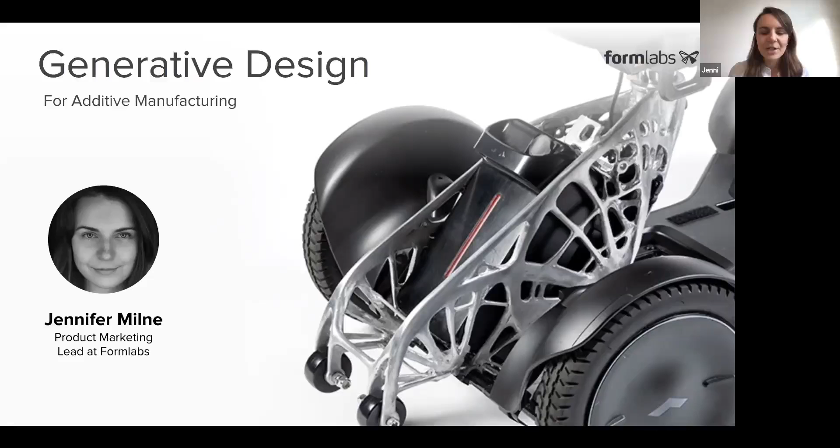Originally got started in the CAD/CAM industry back in 2004, working in steel fabrication. My background is mechanical engineering, but with a focus on product development and the product design process. And then at Formlabs, I've done various things, but mostly my team works on bringing new materials to market, as well as understanding different applications and workflows.

So a little bit about Formlabs, I'll get into generative design shortly. So we are primarily a hardware manufacturer, best known for desktop resin-based systems. We started with Form 1 and all the way to today in 2020, but we kind of have these three flagship 3D printers, the Form 3, our large format Form 3L, and the Form 3B, which is dedicated specifically to biocompatible material.

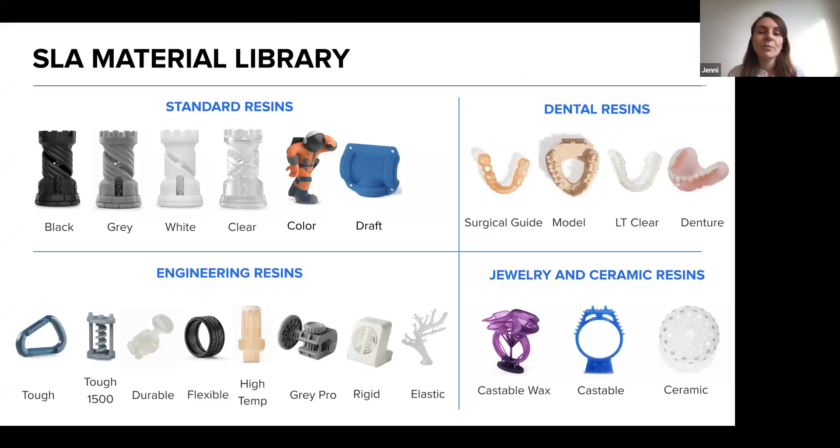While we're focused on hardware, we also make all our own materials, and we have an expansive resin library. We have standard resins for general prototyping, as well as specialty resins, so a lot of engineering resins for more challenging applications, as well as our dental materials or biocompatible materials, and some castable resins for the jewelry industry.

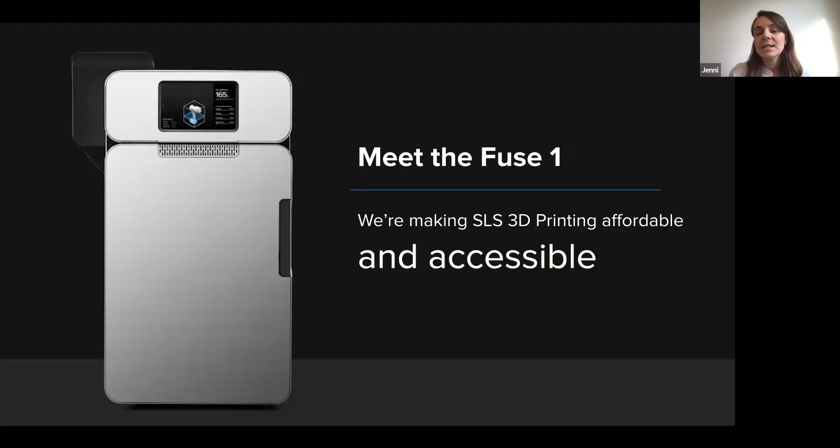And our whole ethos is about making technology accessible. We were one of the first companies to take SLA 3D printing or stereolithography and create a more affordable, easy to use desktop solution. And we're excited that we've announced that we're also doing that for SLS. So SLS is a nylon powder-based system. And with the Fuse 1, we're making SLS 3D printing more affordable and accessible.

So our mission is to expand access to digital fabrication and help anyone make anything. So while we're normally in the hardware world, we're also wanting to bring new content and help you with the design of products. And that's why we're going to be talking about generative design today. It's a really interesting sort of new field, and you may have sort of heard about it, be wondering how it relates to the work you're doing, and how you can take advantage of it. And certainly, as Formlabs, we have lots of customers who are pushing the boundaries of 3D printing and also pushing the boundaries of their design process.

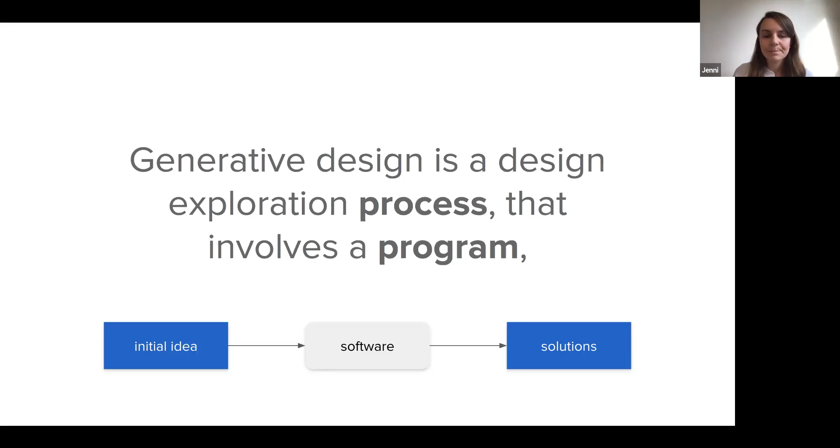You start with an initial idea. There's a program, so you have an understanding that there's some software in the middle, and out come a bunch of solutions. Now, if we take that one step further, this program is going to generate a number of outputs that meet certain constraints.

So we expand this model to say there's not just a bunch of solutions, there's an infinite solution space.

That software we can think of as rule algorithms and the underlying source code. It's still software, but it's important to acknowledge that there are rules about how you reach the solutions, and the source code can provide the different input variables.

So where does the designer fit into this? The designer is really there to fine tune the solution space by modifying parameters, rules, or underlying code. This is as complex as this definition is going to get.

When we put that all together, normally the designer is responsible for a linear design process, or a double diamond design process, where you're exploring ideas and pulling back toward a solution. Whereas here, the designer is responsible for this whole process and this feedback loop.

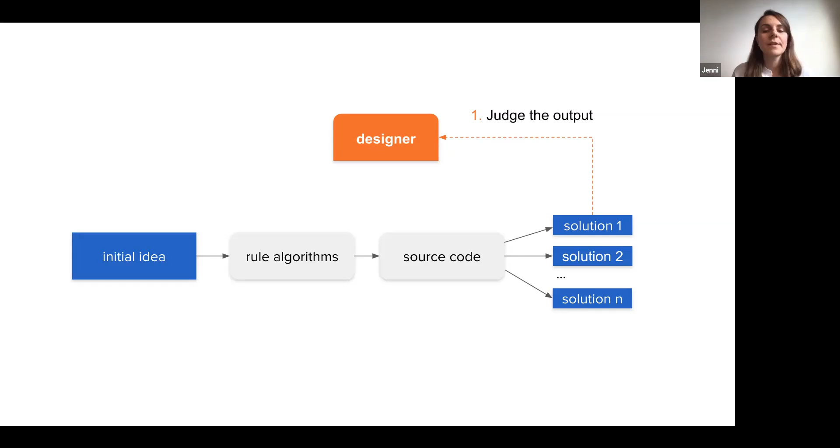So the designer's role is to look at all the solutions, judge the output, and then go back in and fine tune by either changing the rule algorithms or making adjustments to the input problem and the input variables.

Then you can reiterate and get a bunch of different solutions coming out. So it's not wildly different from how you may design products today, but it is much more focused on this iterative feedback loop.

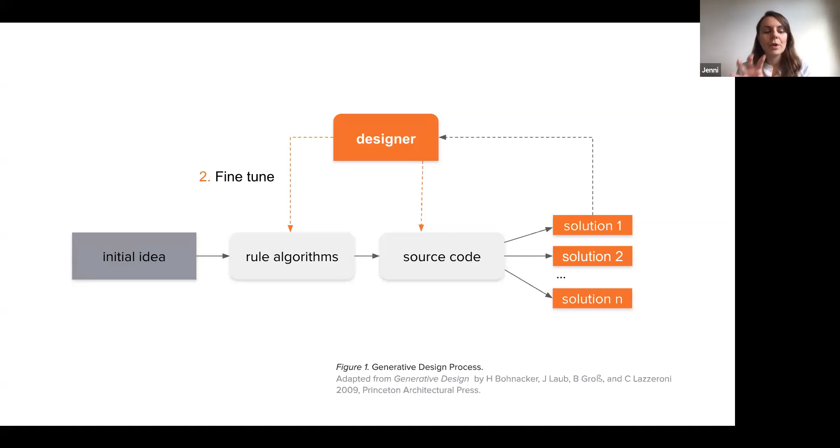And the designer's role is more about the logic and the definition of how you're going to reach those solutions.

One thing which maybe holds back the adoption of this technology is, if you start researching generative design, you're going to see all these awesome visualizations.

You're generating an infinite number of design solutions. This makes it very easy for companies to do really cool marketing where they're like, here's 100 variations of, you know, a frame for a drone.

And it can feel very heavy on the data visualization side. It can feel like it comes from this world of coding, and coming up with cool motion graphics and things like that.

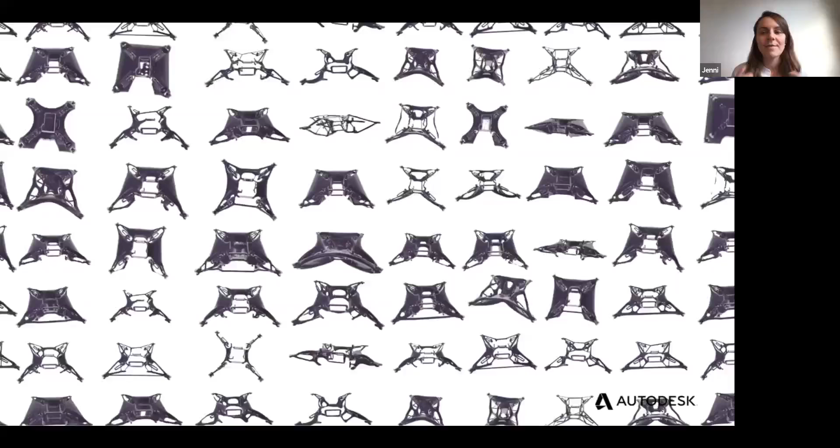So I want to shift your perception, and I'm going to focus on Autodesk Fusion 360. This is what it actually looks like when you spit out a bunch of solutions.

It's much more organized. You get a bunch of options and you can click into those. This is a screenshot from Autodesk Fusion 360, and we're going to stay with that for the step-by-step tutorial.

So you'll start to see clusters of solutions within your solution space. This is where the designer's skill and experience comes into play.

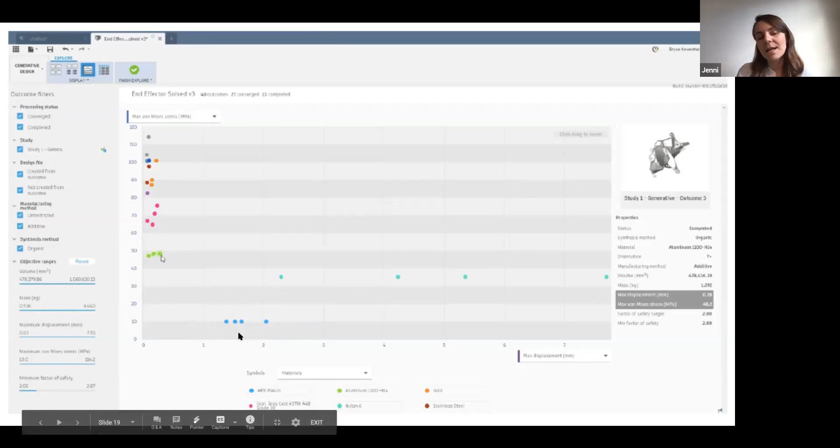Now I'm going to talk about this GE bracket challenge. It's going to feel like a little bit of a departure, but it's going to come back when we get to the tutorial portion.

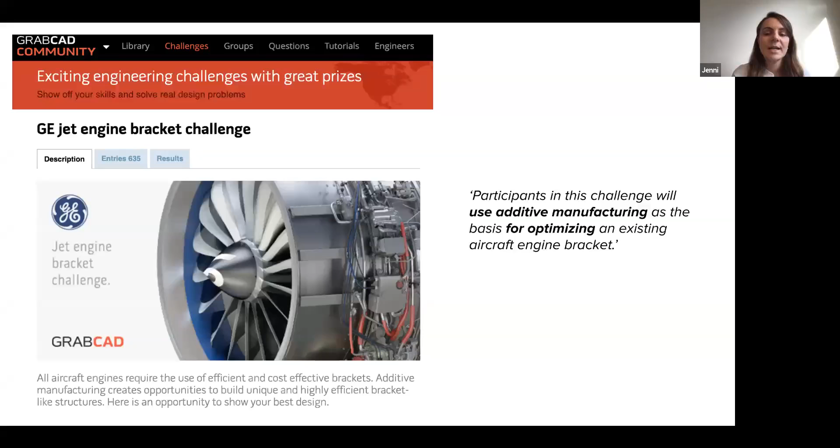GE, General Electric, posted this challenge on GrabCAD, an online community of CAD users, people using computer-aided design. The challenge asks them to use additive manufacturing as the basis for optimizing an existing aircraft engine bracket.

The nice thing about this challenge was they gave them all the information. It was a really well-defined problem.

So this was a really nice, well-defined, closed problem. It's probably reminiscent of the kind of stuff you worked on if you were an engineer in mechanical engineering school, where it'd be a classical statics or dynamics problem.

So all the information was available, and the challenge was to focus on how can you optimize this by removing material and making it super lightweight, given additive manufacturing as the intended manufacturing process.

So there are a bunch of solutions, and they picked the winners based on how much material they were able to remove. In third place was Sebastien Vavassori. He got to a mass reduction of 80.7%, and he used CATIA V5 and MSC.Nastran. These are two different types of software, one being more of a CAD program, and the second being a finite element analysis piece of software.

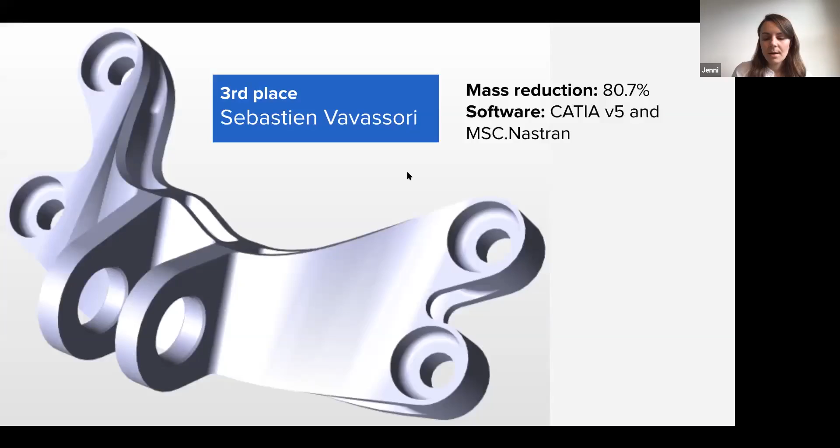Second place, we had Thomas Johansson. He got to a mass reduction of 82%, and he used a software called solidThinking Inspire from HyperWorks. This is more of a generative design type of software.

And then in first place, however, was M. Arie Kurniawan, who got to a mass reduction of 83.4% using ANSYS MD. So again, this is a finite element analysis type software. This is really the skill of the designer setting up that simulation and reaching the most efficient and optimized solution.

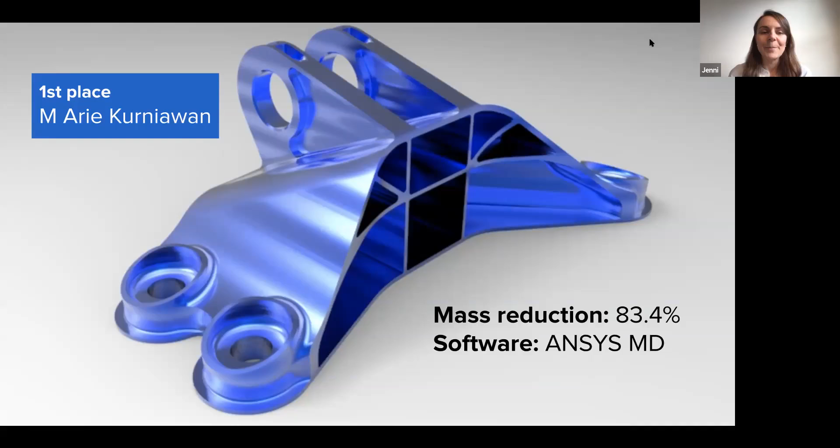So what's cool about this is it hopefully gives you a sense that each of them used a different software, yet they all got to around 80% optimization. So there's a bunch of software out there, and there's no right or wrong way to do this.

But this GE bracket, this part, became kind of synonymous with how to showcase your software solution, how to show how quickly you can get to an optimization and what's the mass reduction, etc.

So this part shows up all over the place. Most companies will use it as a demo piece, and you'll see it all over the internet, especially if you search for generative design. This is an analogy with 3D printing—the Rook piece became a generic comparison part that all the different companies would test to compare technologies. So it has a bit of history there, where the bracket is the comparison piece for design optimization software.

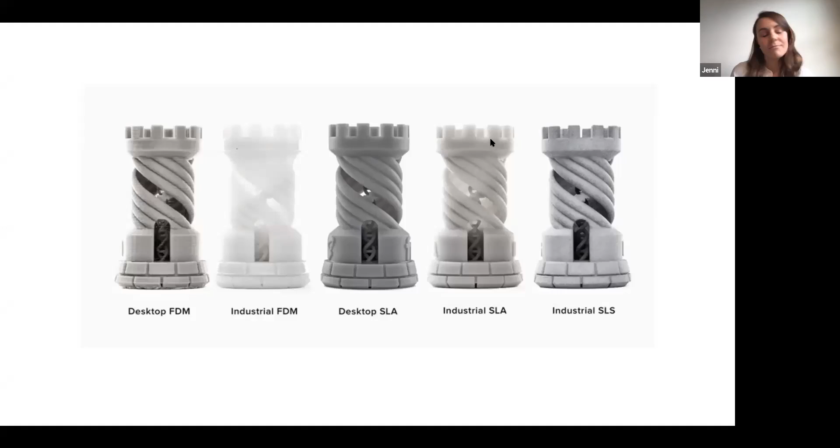Cool. So knowing that, we're going to jump into this great tutorial. This is a tutorial available online from Autodesk, and they use this GE bracket part as their test piece. If you want to go through it yourself a bit more slowly, it's called Understanding Generative Design, available online for free. We're going to fly through it, and hopefully you're able to follow and get the gist of it in a sort of TLDR version.

So let's walk through the 5 steps in the generative design process. The first step is creating preserved geometry. So here is our Fusion 360 workspace. The first thing we're going to do is load that original model in so we can draw over it, and we're going to define where we want to keep geometry—so we don't want it removed when we run our solutions.

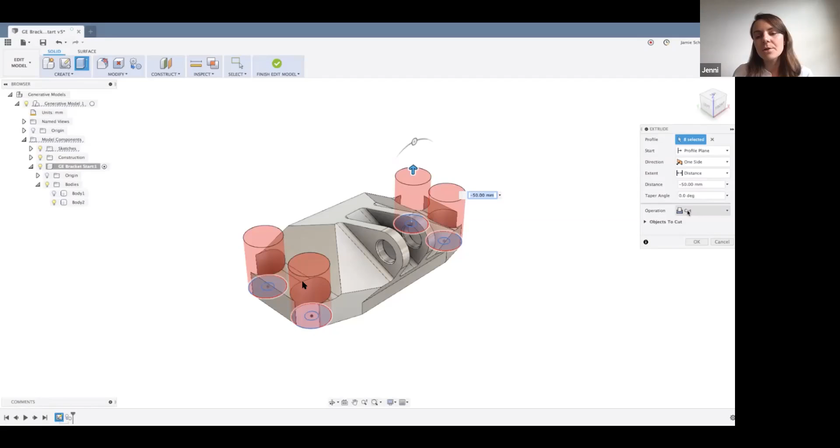So the first geometry we want to keep are these mating holes. You perform this with a similar CAD function—you can draw some circles and extrude them, and then in the next step create that hole. So these are all our preserved geometry. If I flick back, we're keeping these 4 mating points, and we're also maintaining this pivot point. So there's our preserved geometry, and all of the drawing tools are your typical mechy CAD functions—not particularly difficult to pick up if you're already a CAD user.

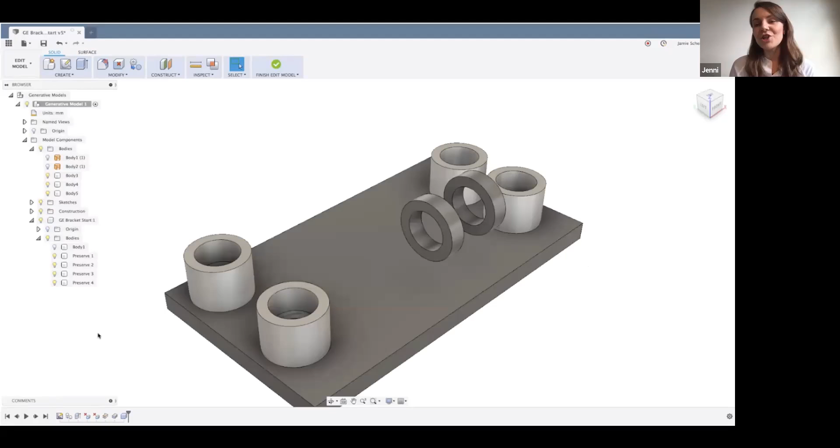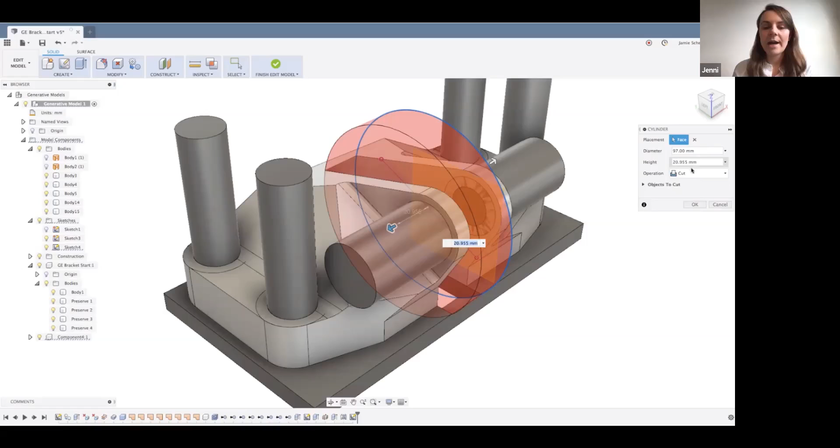The next thing you're going to do is create obstacle geometry, outlining where you don't want it to add material. For this bracket, it's going to mate down on a flat surface, so the first thing we draw is this flat area to say don't put geometry here, because we don't want it to create a collision—something that would cause a problem when you try to bolt this thing down. We also want to make sure no material is in those holes, so we've built these cylinders through where we want those holes to be, through this mating point. The last and most complex piece is that we don't want material throughout this pivot point, so they've created this thicker cylinder to keep that area clear. And then that's sort of it.

So then we do a bit of cleanup and define our design space, organizing and assigning geometry types to the bodies we just created. Here's your tree—once you get to this stage, you have these different options you can click on to indicate preserved geometry, obstacle geometry, and to highlight the body that serves as your starting shape. You can import that starting shape just to draw on top of it, then hide it and ignore it as you go through the solution process.

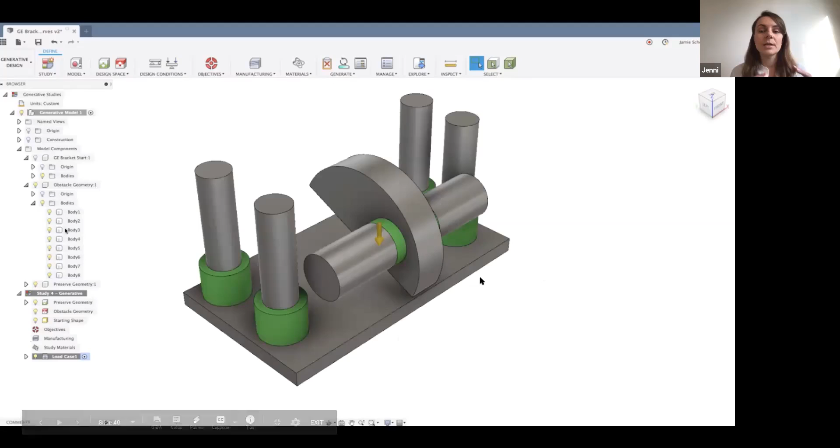So here we've clicked on preserve geometry, and we're highlighting the smaller cylinders that we know we want to keep. We do the same for obstacle geometry. Now our starting shape has been hidden, so this is all the physical geometry information that defines where you can and can't put material.

Now we have the geometry constraints set up. You're also going to define loads and assign requirements for the solutions, rules that the solutions must meet. This is where the skill comes in of how you set up this design problem.

Fortunately this is a nice example because the loading conditions are really well understood. We have four loading conditions: a static vertical load, a static horizontal load, an angled load, and a torsional load.

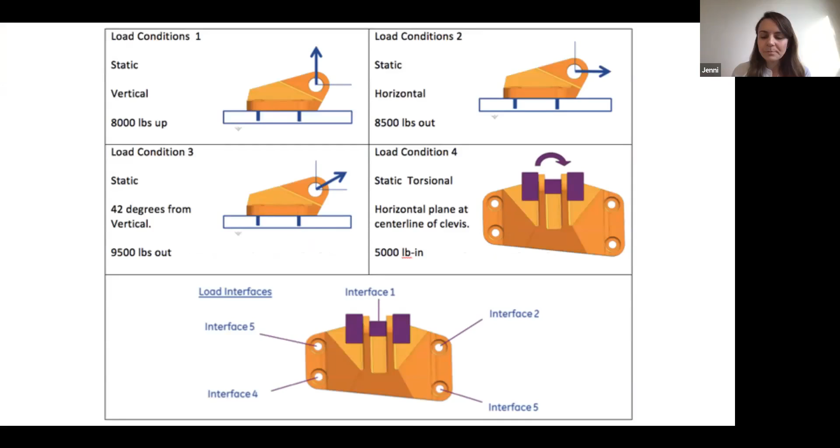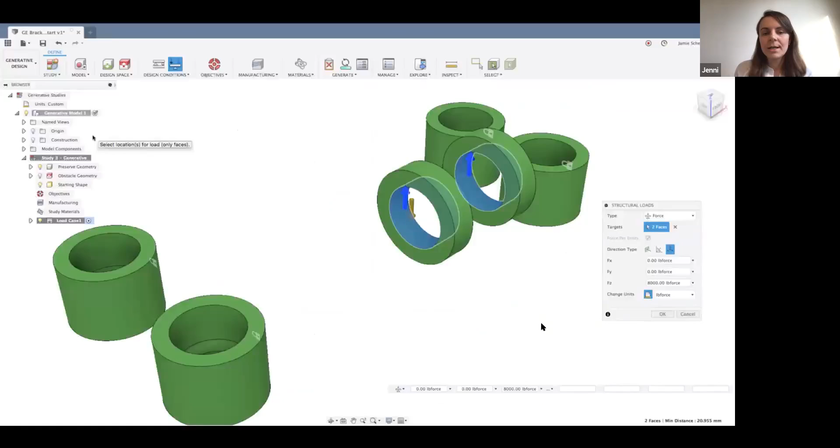So fairly easy to plug these in. Here we can highlight this internal surface and apply it as the vertical load. Now that we're assigning loads, this dialog pops up and we can put in that 8,000 pound force. You go through step by step and apply these four loads to your model.

Then you get into assigning objectives. Here they make it really easy. A very common one is to try to minimize the mass, so you're trying to create a very lightweight structure. This is sometimes referred to as lightweighting.

You also have the objective to maximize stiffness, and this dialog gives you the opportunity to apply a factor of safety. This is great depending on your confidence level in the loads - do you know these are conservative loads, or are they best guesses you're not sure about? You can increase the factor of safety depending on how well you understand the problem. Here they've gone for a factor of safety of 2.

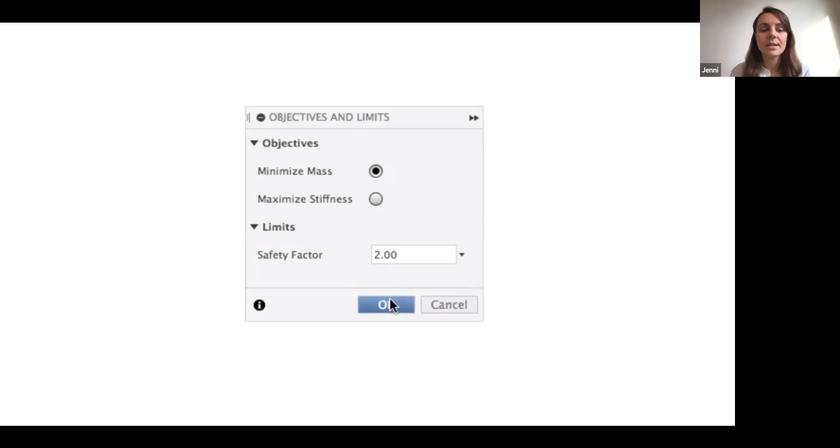Then you get into telling the system all the different ways you might manufacture this. Unrestricted can be clicked - that's when you get all these weird, wacky and wonderful geometries that may look very different to what you would have thought of using your own knowledge of manufacturing processes.

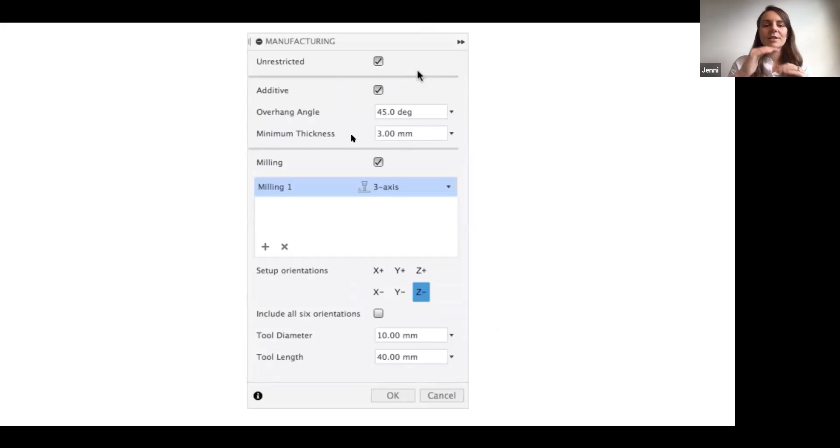Explicitly, you can choose additive as an option. I'm not totally sure what the differences are between unrestricted versus additive - I'm sure they're fairly similar because additive allows complex geometries. But the nice thing is you can add additional constraints. Depending on your knowledge of your additive system, maybe you want to minimize the overhang angle, or there's a minimum wall thickness your system can handle, so you can punch in those numbers.

Also fairly new to these systems, they're starting to build in more traditional or subtractive manufacturing, which is cool. So you can also say, okay, I could mill this. We select that, and then you can say if you have a 3-axis mill or a 5-axis mill, and put in information about your minimum tool diameter and that sort of thing.

So you can punch in a design problem and actually look at a challenge like this: well, should we mill the solution or should we 3D print the solution?

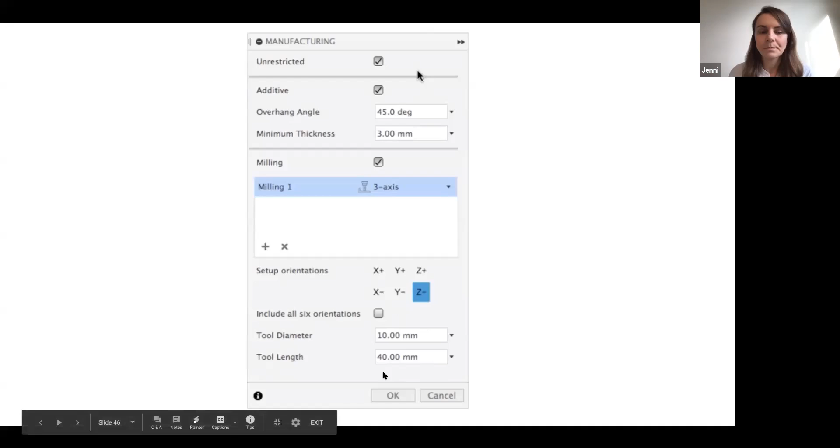The last step is choosing your materials. If we've said we're going to look at additive and milling, you may put in the typical materials you have available for milling, and also add materials you might 3D print in. Built in, they have these material profiles, and you can also create your own custom profiles for different materials you might be working with.

So that all gets plugged in, and that's sort of it - you've defined your problem. You have your geometric constraints, your loading considerations, your goals of what you want to optimize for, and your manufacturing equipment and materials constraints.

So the last step is to go ahead and generate your design. This is where it's probably going to look different depending on the software that you're using.

Autodesk Fusion 360 makes you pay for it at this point with cloud credits. They partner with Amazon Web Services so that if you're working with Autodesk software doing renderings, or in this case computation around design solutions, they have this unified way to pay through cloud credits. I think when you sign up you get 100, and my understanding is they're about $1 per credit. So for this study, we may be faced with, okay, I know this is going to cost like $25. Do I want to move ahead? And obviously that varies depending on the complexity of the part you're designing and how much computation is going to go on.

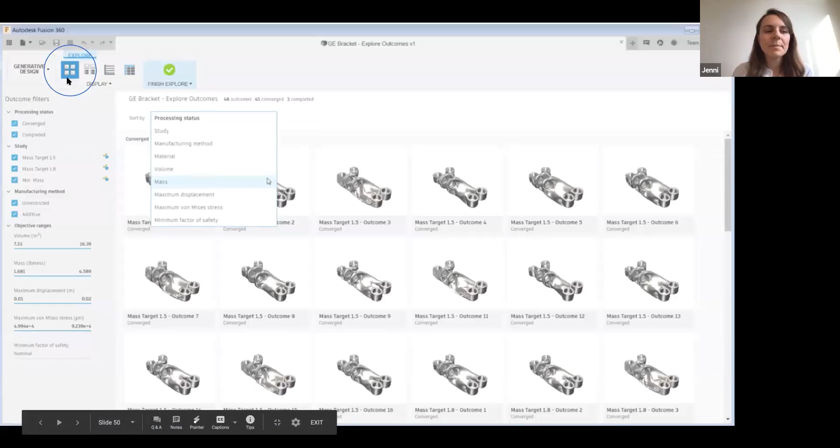So we're back at the screen. Here are our solutions. Again, there are these 4 views up here, and I'm going to talk through a few of them. This is a thumbnail view. Because we asked it to sort by mass, and that was one of our goals, it's going to put the lightest one in ascending order down to the heaviest one. So you may just go ahead and look at the lightest one and say, great, that's what I'm going to go with. But you may want to look at some nearby solutions to decide which one you want to move forward with.

So basically, once you generate designs, you have 2 options. Either you're trying to pick one that you want to move forward with, or you're doing an inspection to see if there's anything you want to tweak about how you set up that problem, and you could go back and reiterate. Or maybe you spit out all these solutions and decide, okay, we're definitely going to use machining, so maybe you'd do it again and look at machining options with a bit more granularity to try and produce a few more there.

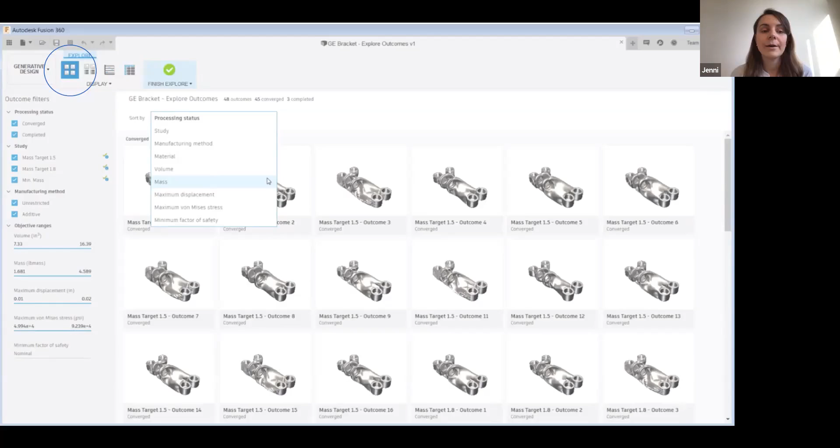The next view is a detailed view, very similar to thumbnail, except it opens up and shows us all the specific information for these different solutions. So we have the material, it's the titanium alloy. And then, as I said, very small increases in mass, but generally moving in that direction.

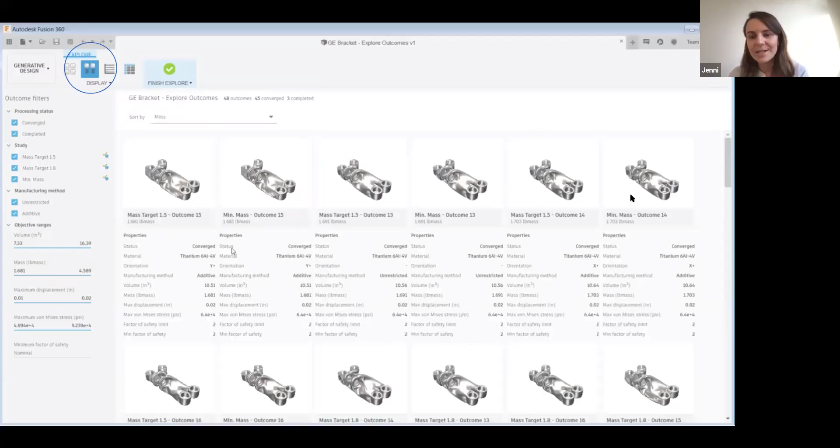So at some point, these are all very similar in terms of properties. There may just be an aesthetic choice where you're like, this one looks cooler than that. That's totally fair.

Another thing you can do is start to drill down, and maybe you get down to 3 or 4 options. You can individually select those and then start to compare them on the same screen as well, which is pretty cool.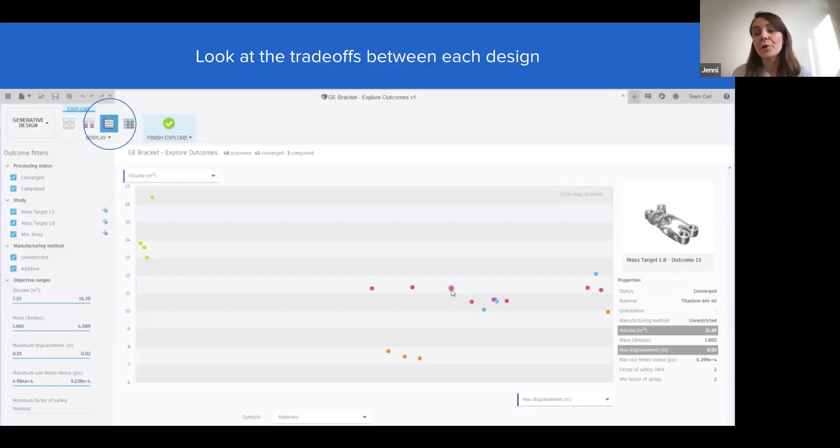So that was a run through of generative design. Again, I wanted to present it from more of a mechie CAD perspective. Hopefully this feels not that different to some FEA analysis or simulation software you've tried. So as with CAD, there are lots of different programs and lots of different ways to do generative design. I think Autodesk has a really nice solution for people familiar with a mechanical engineering type CAD program.

So now I'm just going to talk about where additive manufacturing fits in, why we as Formlabs are interested in this as a topic, and help you understand the space. Basically it's because these 2 technologies work really well together.

These are really 2 technologies that go hand in hand, partially because, while I showed you that drop-down menu with various manufacturing solutions you could pick, that first bullet point that said unrestricted, that was kind of where these softwares started. Before, you would run through this and it would spit out a bunch of designs without any manufacturing constraints attached. So in the early days, additive manufacturing was really one of the only ways to realize some of these novel design solutions these softwares were spitting out.

A lot of companies, say you're GE making that engine bracket, might come to 3D printing and say, okay, today we make this bracket with milling, we're thinking about 3D printing it. If you don't change the design and look purely at labor and materials cost, there may be no economic benefit to 3D printing that part. However, if you take that original bracket, traditionally manufactured, and apply some optimization like we saw with the design challenge, so you get 80% less mass, then that part may start to be cost competitive using 3D printing to manufacture it.

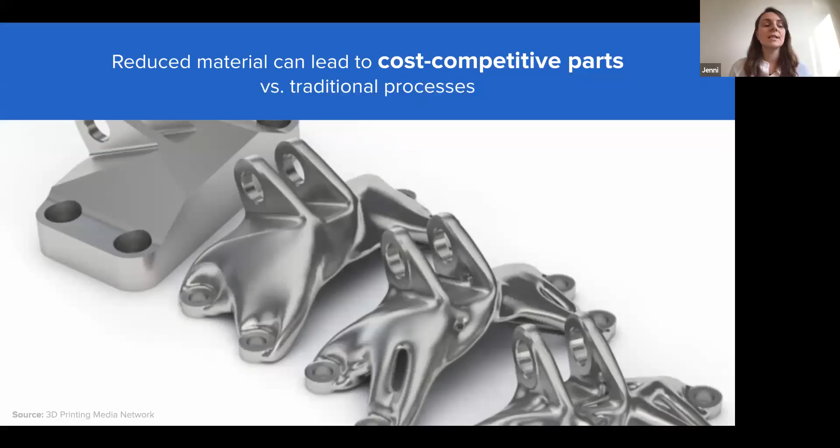That performance gain of reducing weight may have other cost benefits down the line, especially if this is a component going into an aircraft or a car or somewhere very performance based. So these two technologies together can start to make additive look more economically viable for companies considering redesigning a part they traditionally make today.

As a happy coincidence, these crazy organic structures tend to actually be easier to print with 3D printing than solid chunky things, because often they're inherently self-supporting. So these complex organic, lattice-based things are kind of easier to print on 3D printing. That's why you'll see a lot of companies new to the space tending to print things with a lot of latticing rather than solid chunky parts. These outcomes just play really nicely with this technology.

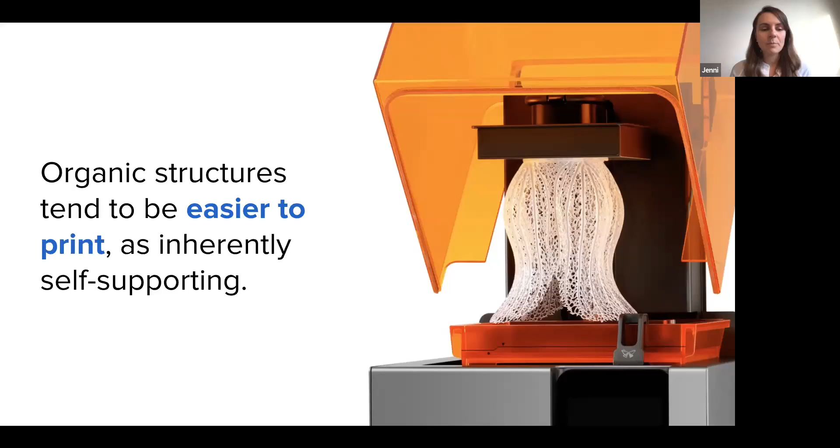A couple more things to be aware of. This might be the first time you're hearing these, but these are generally themes that come up when you're thinking about whether 3D printing makes sense.

Additive manufacturing starts to be more cost competitive with higher part complexity. In this graph, the cost of additive manufacturing is relatively flat despite increasing product complexity. That's not the case with traditional manufacturing, which gets more expensive when your part gets more complex, with more internal features and overhangs. So when your part's very complicated, 3D printing makes more economic sense.

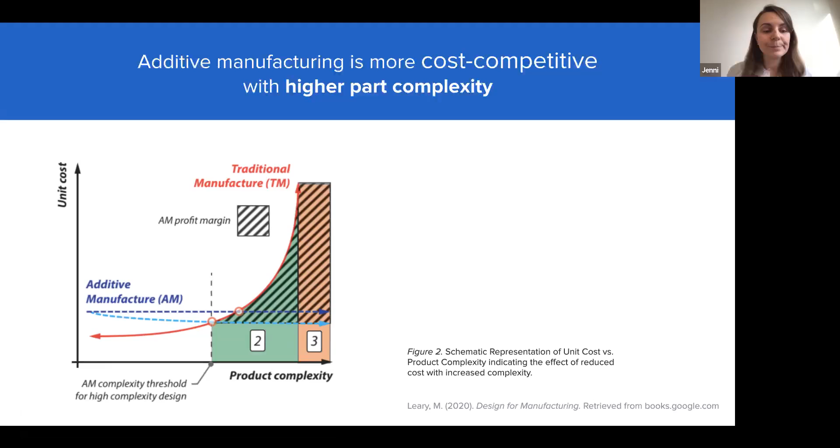On the flip side, additive manufacturing is more cost competitive at lower production volumes. I'm sure you've heard of economies of scale - when you're making a lot of something, the cost of traditional manufacture can come down because of the upfront tooling and other setup costs. With the cost of additive manufacturing staying flat, that means it's good if you are doing a small run of something.

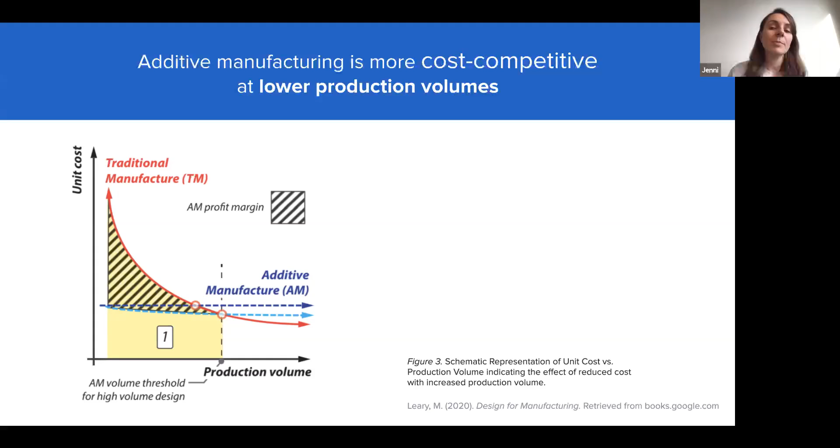So if you are interested in mass customization, or maybe you're a manufacturer with a minimum order quantity that's really high because of the cost of traditional manufacturing, using additive manufacturing could allow you to take on smaller jobs, be more flexible, and be a bit more exploratory with new business you might otherwise have turned away.

So those are the good things. However, pros and cons - there are three challenges that emerge that I'd encourage you to at least be aware of at this stage.

The first is how to characterize novel materials. While that tutorial looks very simple, if you're going to machine it out of ABS plastic, that's a very well understood material you could just grab and use. If you're working with, say, Formlabs materials, these are specialty resins that may be less plug and play - there may not already be a profile for these in the software. So you'll need to look to the technical data sheets from these companies to create custom materials profiles.

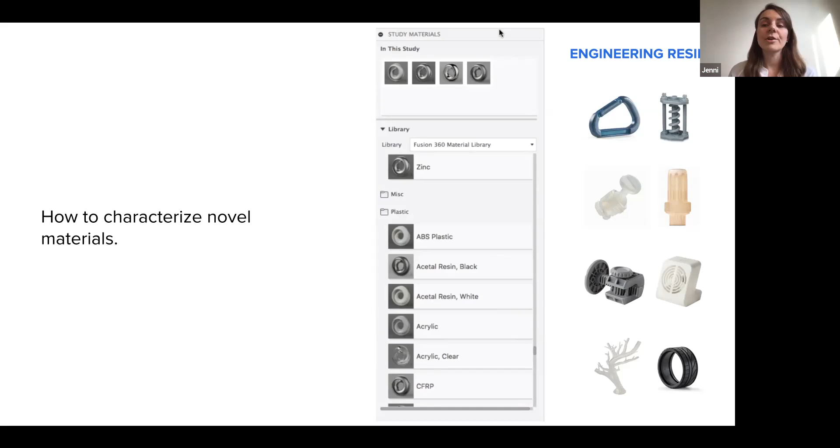Materials is really a booming space in additive - there are new materials all the time. So making sure your simulation and outcomes match reality is also very important. Some companies using generative design and 3D printing may have a feedback loop where they manufacture a part and then measure the forces on it to help refine their model and get more predictable outcomes.

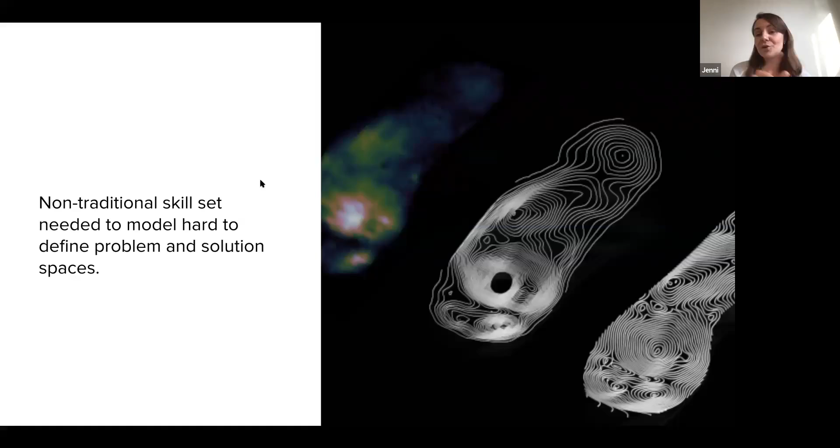Another thing to consider is this sort of non-traditional skill set may be needed when you want to model hard to define problems and solution spaces. The example I gave, I've stressed multiple times, was quite straightforward—the geometry was already known, the forces were well understood and easily defined, so it was easy to go through the process. But what if you're interested in something a little more tricky, like the New Balance example, where they want to use runner performance data? How can I take the pressure data from an individual's foot and use that to inform product design? That's not a plug and play problem—they may need custom software and a lot of R&D to figure out how to take advantage of that input data.

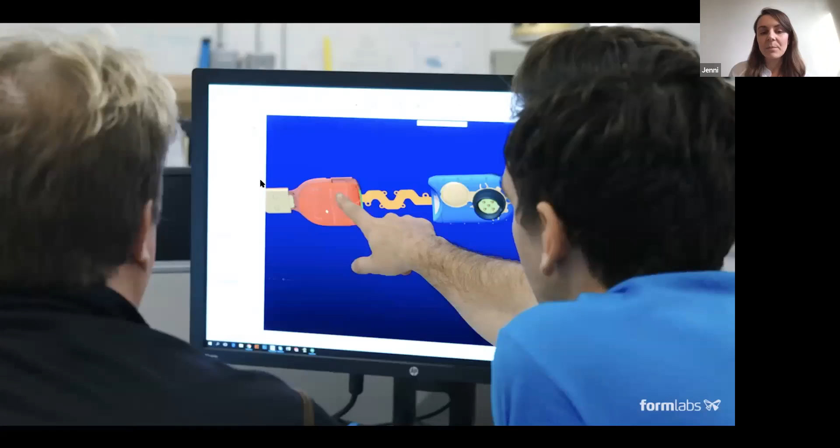With these design skills, it is always evolving. We kind of came from a world of sketch modeling and paper sketches. The next jump is moving to CAD design and digital design, which can require a different skill set, or is something people need to work on to pick up.

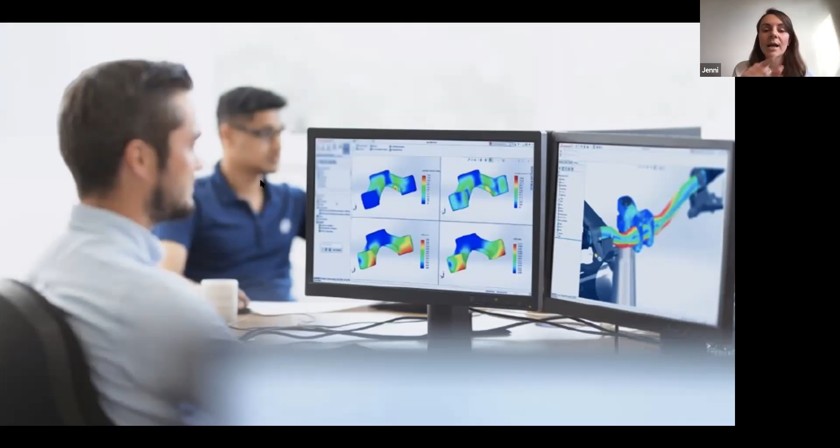Then there's this further skill set of simulation or finite element analysis, where you can appreciate the designer has a bit of a different problem solving mentality. The skill is really in understanding the external circumstances around your part, and having more of a brain where you can think through the logic of what's going on, look at the output, and circle back through the system to adjust part design as you go based on the simulation. For me, generative design is sort of an extension of that simulation-based thinking.

The last thing is, while part complexity is great for additive manufacturing, where it's not great is on the back end. If you're producing hundreds of custom parts, you need to think through how you're going to track them through your production process, and how you'll make sure the specific part for the specific individual ships out to them. When you're making generic parts, there are things you take for granted that go away when you're making more complicated or custom products.

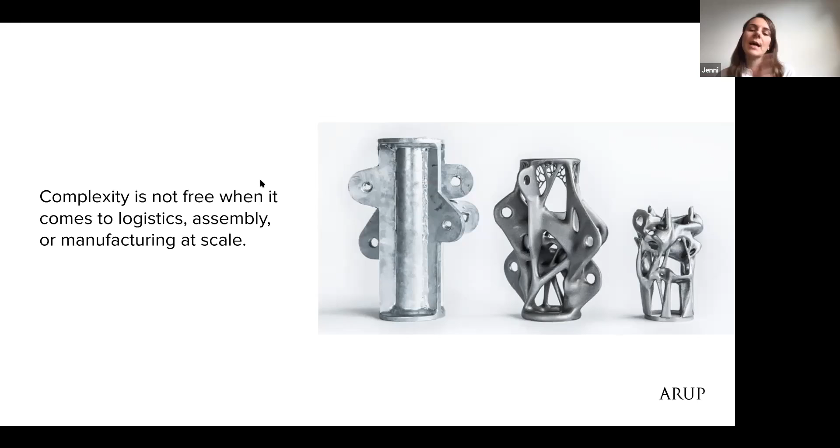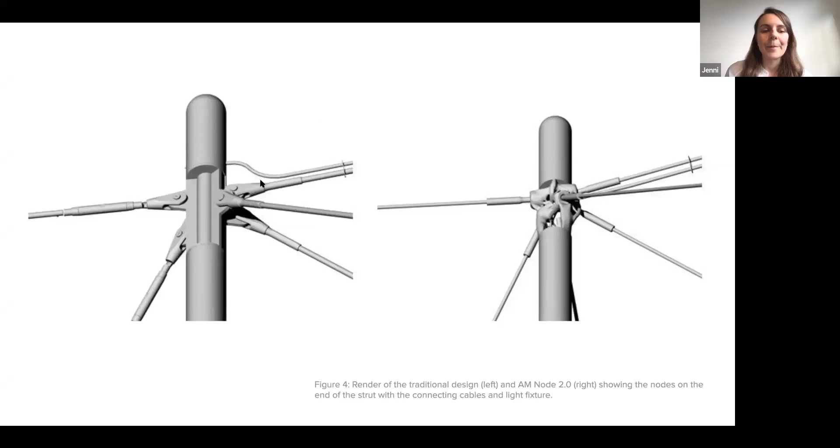This is an example from Arup, a civil engineering company that does a lot of cool construction installations. This was a project where they worked on a structure with hundreds of unique joints, which were already being made uniquely with traditional machining. They then looked at how they could optimize it using generative design and additive manufacturing. Here's the joint in use—each joint holds things in tension at different angles and positions. And this gives an impression of what the final structure would have looked like.

I always think about the construction company putting this together—how do you make sure that on site they put this together correctly when every single joint is unique? I compare it to putting together a really complicated IKEA bookshelf where every single screw is different—there are a thousand ways to put it together wrong, and only one way to put it together right. These really complicated, computationally designed buildings have big implications on the construction side, requiring a much higher level of organization, part labeling, and coordination.

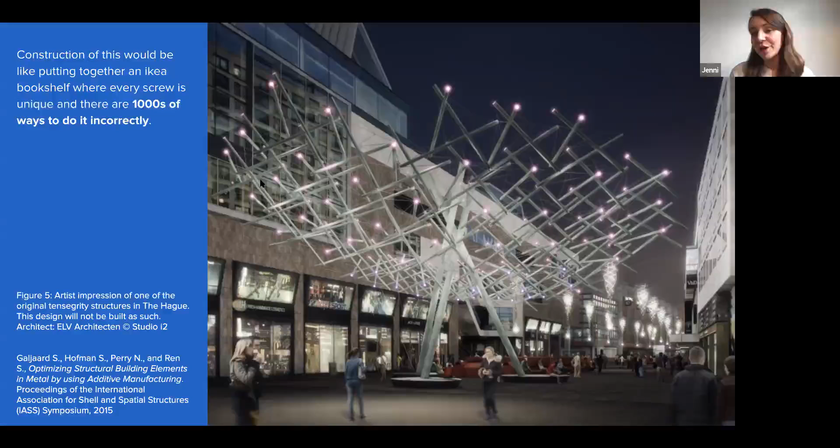Now we're going to jump into a couple of examples. I know there have been some peppered throughout, but we're going to deep dive a little bit. I want to talk about one Formlabs customer for whom this was their first exploration into generative design, and they had some really great results. Hopefully this gives you a bit of motivation to pick apart and try this process and see what the value could be. So WHILL is an electric vehicle company—they specialize in personal mobility, and they're based in Japan.

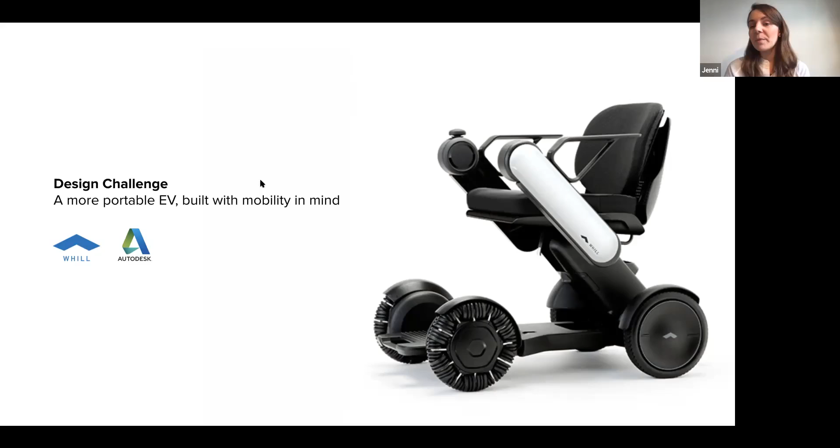So their design challenge is how do they make a more portable electric vehicle? The design problem they hone in on is, if you've ever seen someone trying to get a wheelchair in and out of a vehicle, it's pretty painful. And that goes against the whole point of trying to help people get out in the world and enjoy their lives.

And they worked with Autodesk Fusion to create this generatively designed version. This is Yoshihiro Hirata, who's head of their vehicle development group. He said they were able to lighten the frame alone by more than 40%, which he looks pretty excited about.

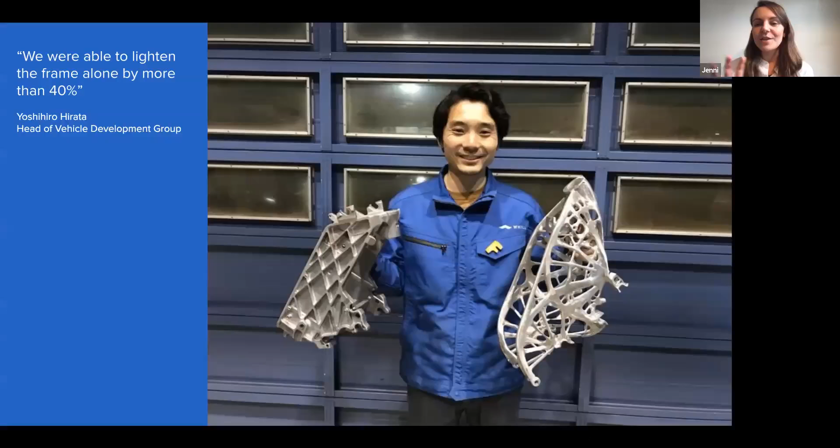So yeah, it's kind of crazy. This is a large metal piece, and you might be wondering how they use Formlabs technology. We do not have a metal printer. We make plastic materials, photopolymer resins. So I also want to touch on this novel fabrication process that they use to realize this design.

Because this part was so big, they had to split it into 4 pieces. So this is the solution that came out of Autodesk Fusion 360 - they broke it into 4 sections so it would fit on their Form 2 build platform. Each of these pieces was printed on the Form 2 using our castable wax resin.

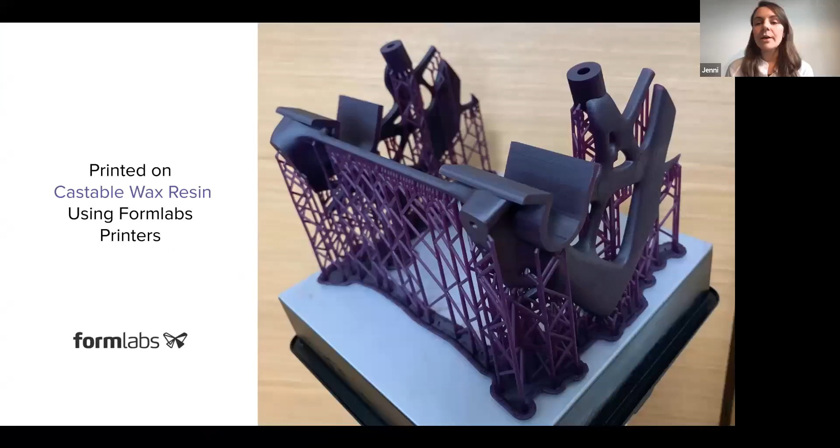Castable wax resin, if you don't know it, is typically used by jewelers. It is wax filled and designed to burn out cleanly. So you can print a part, pack it in investment, heat it so that it creates a negative, the material burns out and leaves a negative, and then you cast your metal into it. It's typically marketed to jewelers for making engagement rings, casting precious metal, but it's also used in some engineering contexts, like it was here.

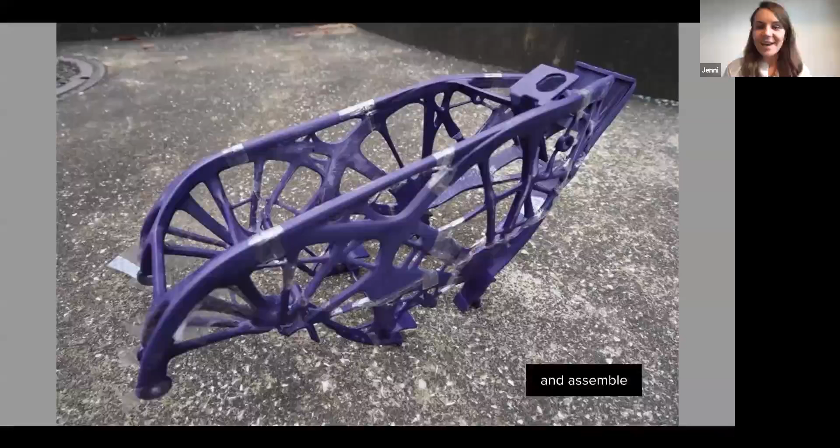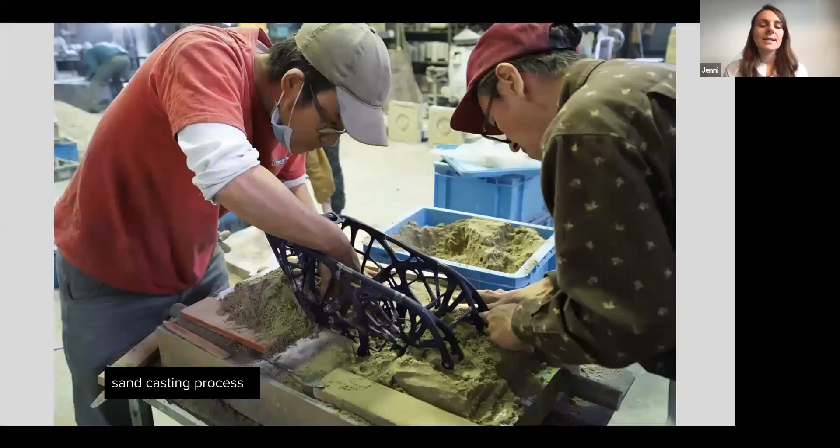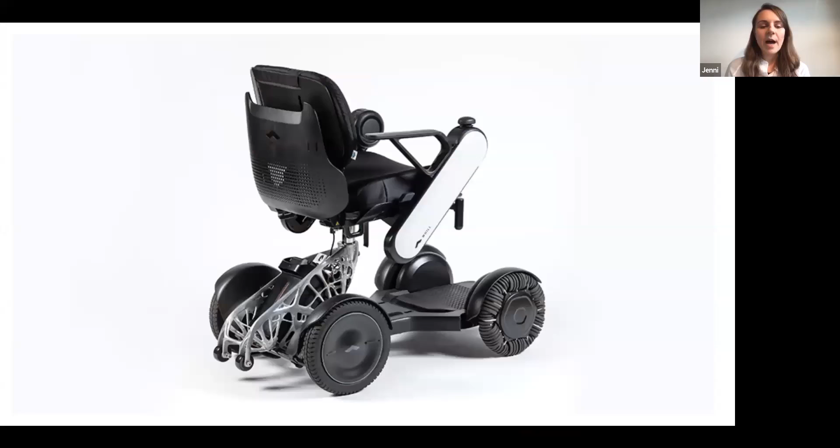So they took those 4 pieces, assembled with sellotape - which again, I love the quick and dirty proof of concept of this - and it seemed to work great. Then they did this elaborate sand casting process. They're actually packing it in sand, which has a binder in it. And then the whole thing's kind of baked. Our material burns out, leaves a negative, and that's where they were able to cast the metal into.

So yeah, this is the final proof of concept, the end of their project. They had this 40% lighter bracket on their chair, and that definitely helps them realize their goal of making this a much more portable mobility vehicle for someone.

So yeah, they're working pretty hard now. Obviously that manufacturing process is pretty elaborate, but they've tried it, they're excited by the results, and now they're working on how they can take what they learned and get to a solution that makes more sense for mass manufacture. So maybe that's not using this exact design, but maybe it's helping them reassess how they are machining their piece today. Super cool to see that going forward.

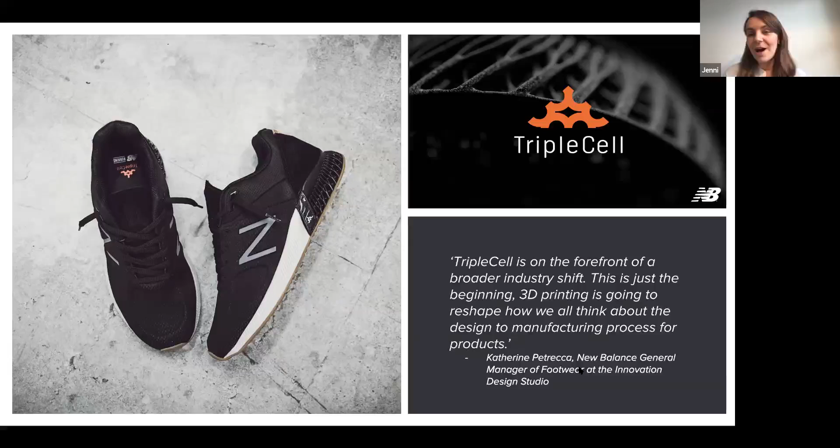All right, now I'll shift gears to a company that has more of a long-term vision for how they want to use this technology. We're going to talk about New Balance. Last year, New Balance announced the TripleCell platform. For them, TripleCell is their research effort at the forefront of this big industry shift. They really think 3D printing is going to reshape how we all think about the design to manufacturing process for products. I wanted to highlight this definition because they do talk about the manufacturing process. So this really is a story of 3D printing plus this generative design theme in the background.

So here's the first R&D path they undertook, which was really focused on this midsole customizer. This was a collaboration between New Balance and Nervous System, who are a really incredible digital design consultancy doing really novel stuff in the generative design space. So they approached them with a design problem.

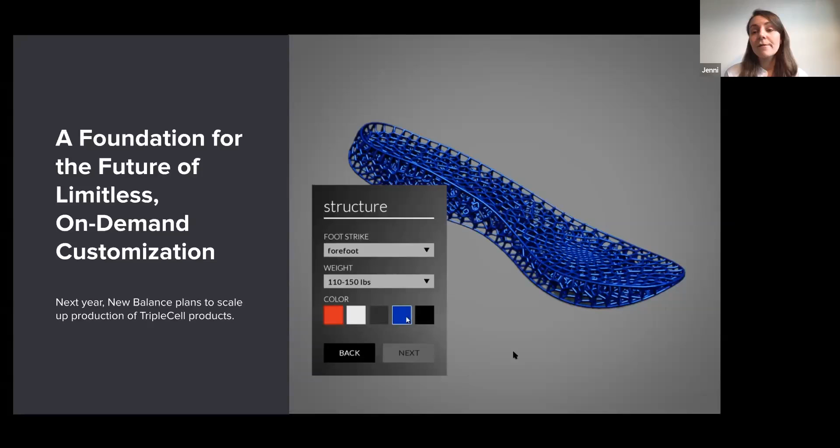I'm going to start with this solution. Essentially they made this midsole customizer. You can see it has a very simple user interface here. They can go in and either stand on a pressure pad or take some measurements for the runner and determine where their foot strike is - that's where the majority of their weight falls as they run. They can input the weight of the runner, and then it's going to automatically generate a unique midsole based on that performance data. So they're very excited about this as a foundation for a future of limitless on-demand customization.

And yeah, this all started just as a collaboration. They came to Nervous System with the design challenge to improve the design of the midsoles to better adapt to the performance data from a runner.

So this is not a closed problem. It's a very open problem, and it's not a problem that's really been solved before.

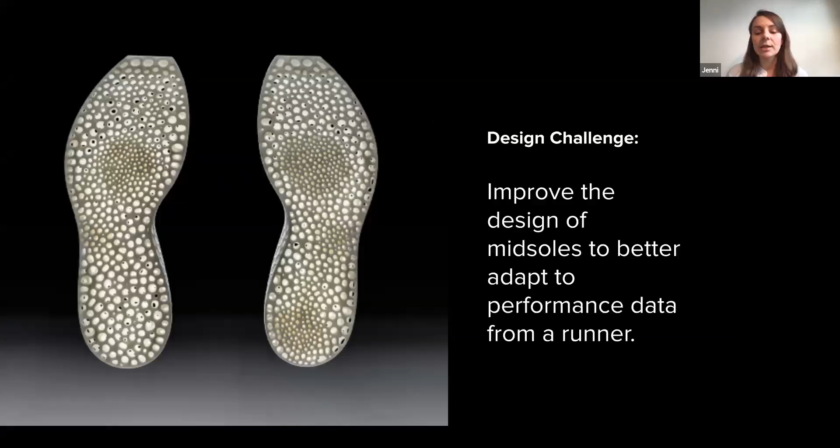So you can see here, these were some of the early 3D printed midsoles Nervous System developed, where on this foot there's a much tighter mesh on the ball of the foot and the heel, whereas on the other foot there's only really a tight mesh on the forefoot. So this runner obviously has quite different running behavior on one foot versus the other. This shows you the level of customization that could result if they can take advantage of that knowledge.

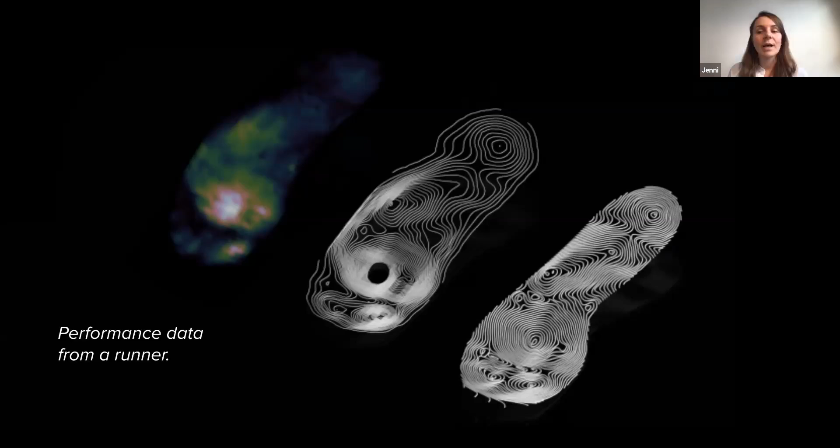So yeah, they started with this performance data from the runner. Here is a plot of pressure data. They were able to create a mesh from that, but they had to figure some stuff out. Like, okay, so we know where the runner puts most weight on their foot when they run, but how do you decide what that means for how you design the product? So they actually had to do a lot of iteration to take that data, create different meshes, test them with runners, and figure out what that means.

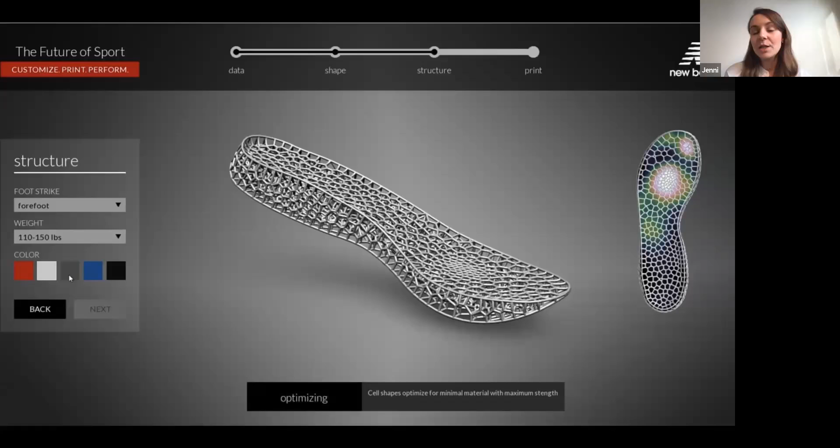So they've determined that where the most pressure is falling, where the most force is applied, you want a tighter mesh. And that's what they've developed in this technology demo.

So this midsole customizer was actually demoed at our first Digital Factory event. I think it's something they're still working on, but this is from a couple of years ago now, so a little outdated, but very, very cool. And it does show you that if you want to do something very novel, you may need to develop your own software solution to get there.

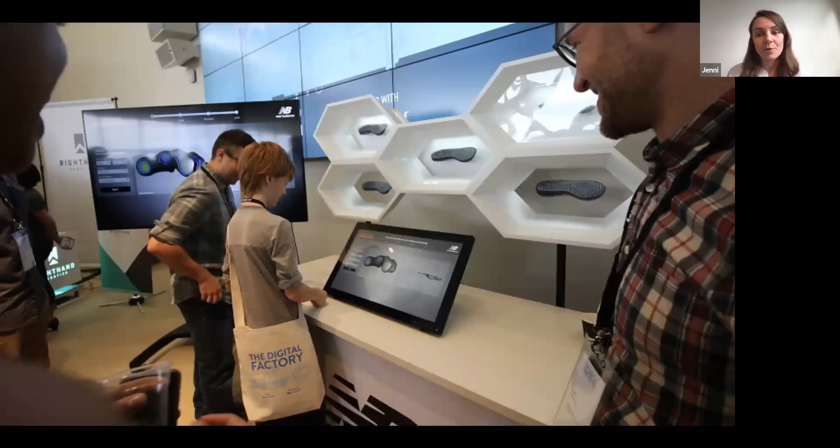So the second R&D path they went down in parallel was working with us. They worked with Formlabs to develop rebound resin.

Since then, they've actually launched 2 sneakers with rebound resin, using Formlabs material as end-use production parts. The most recent shoe they launched was the FuelCell Echo Triple, which came out in September of last year, where the black part, the front of the shoe, was 3D printed. And the first shoe they came out with was a 990 Sport TripleCell, where the back of the heel was printed.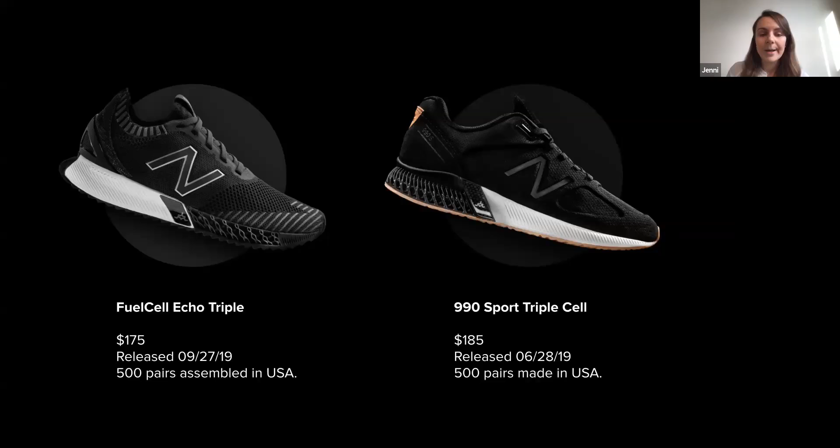So they're really exploring in parallel, okay, how do we actually produce parts with 3D printing for end use? And for both of these, there are 500 pairs of shoes out in the world being used by runners and other people today. So the design challenge they approached us with was, could we match the properties of current performance midsoles to deliver the support and springiness athletes expect?

So they looked at our current portfolio of materials, they may have evaluated some of them, and there just wasn't something that would meet their needs. So they actually approached us on a consulting relationship to develop exactly the right material they were looking for.

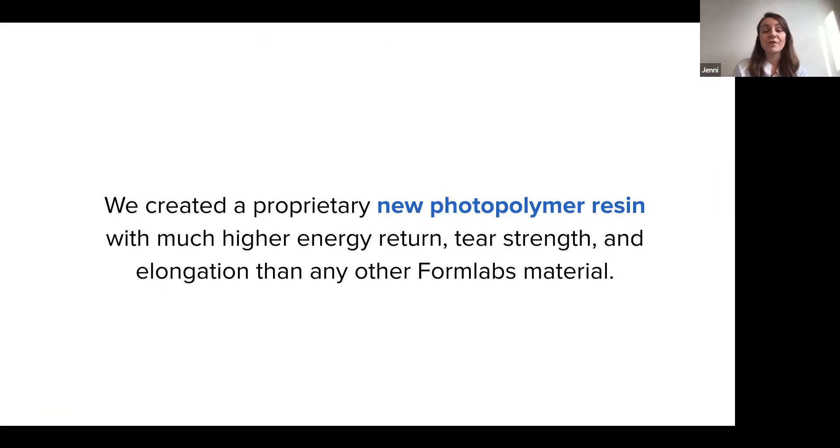So in 2017, we started working together. New Balance and Formlabs announced an exclusive partnership. And together we created this proprietary new photopolymer resin that has much higher energy return, tear strength, and elongation than any other Formlabs material. These properties are very competitive with all the 3D printing, midsole, shoe-based elastomer materials out there. So this is really at the cutting edge of materials development.

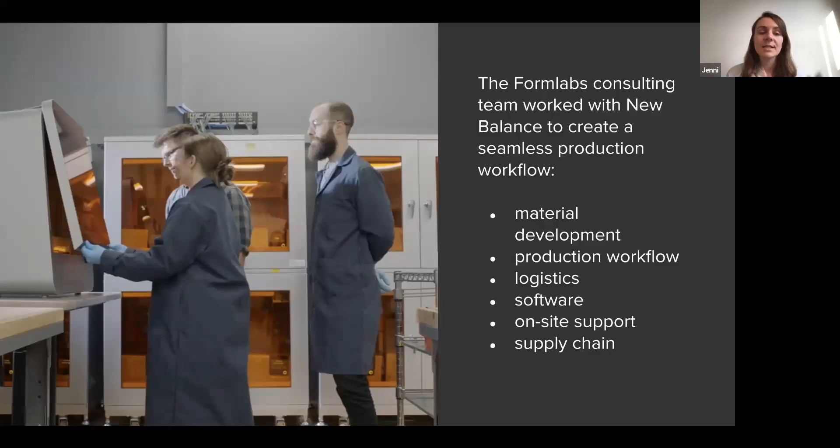But yeah, I mentioned, one of the things to consider with mass customization projects is all the logistics around it. So not only did we develop a material with them, but we worked with them to create this seamless production workflow. We also worked with them on logistics, on our supply chain. We provided on-site support. We have unique hardware setups at their factory in Lowell to make all of this possible.

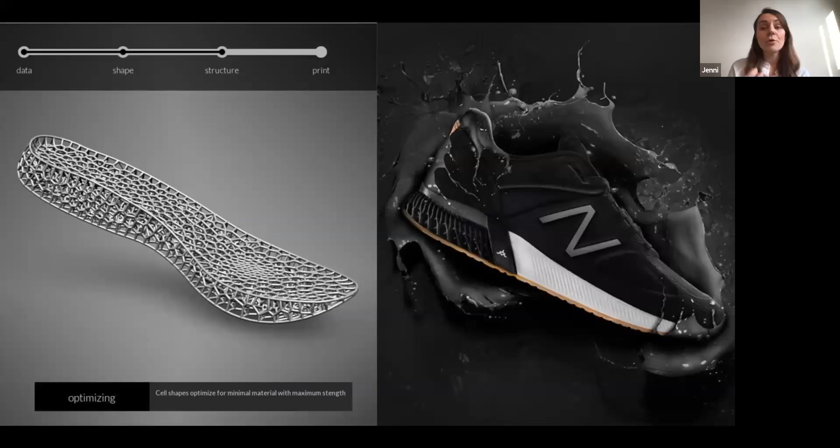So yeah, that's kind of it. And I wanted to highlight this because I think it's really cool how they have very distinctly followed these 2 parallel research paths. And I'm very excited for the convergence of them, but these are two technologies that have unique challenges in their own right. So while you may want to manufacture, mass customize something with 3D printing, I think this is a really smart approach to break down the problem into smaller chunks.

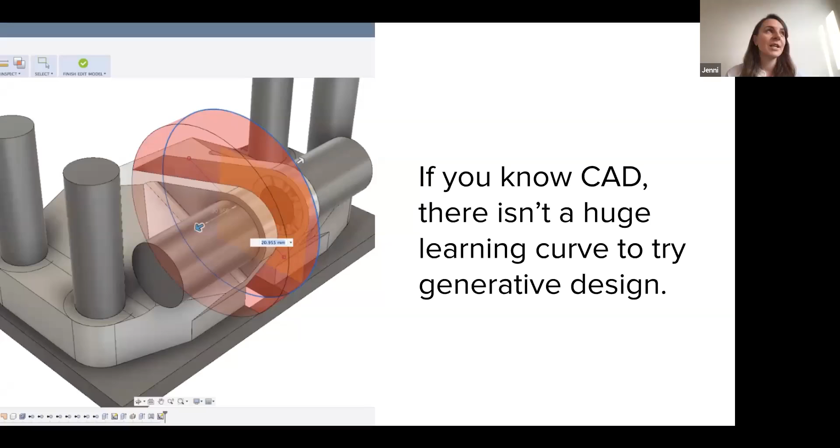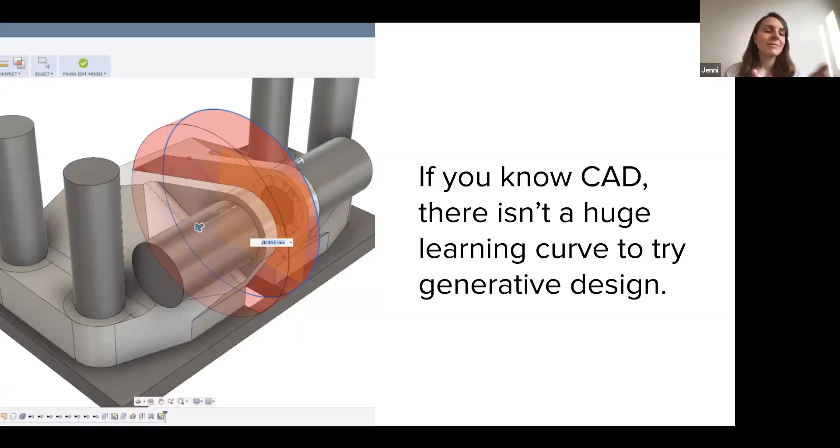Cool, so a lot of information in here. This is a new topic for us, so I'm going to circle back and summarize what I hoped you'd get out of the presentation today. First, if you know CAD, there isn't a huge learning curve to try generative design. I think it has a reputation for being super novel and cutting edge, but I hope by showing you the Fusion 360 tutorial, you saw a familiar workspace, and that this well-defined problem is something you could definitely have a go at today.

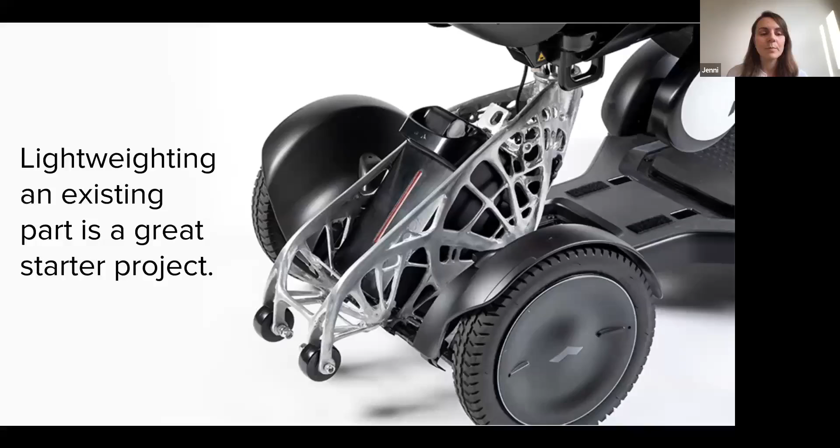My second piece of advice is that if you're going to try a project, you should start with lightweighting: taking a part you already make and figuring out how much mass you can remove while still getting the same performance. Lightweighting an existing part is a great starter project if you're exploring generative design.

Lastly, if you have a more ambitious end goal in mind, or want to do something disruptive versus what you do today, it would be smart to break that long-term vision down into smaller R&D projects. With that approach, you're building up internal expertise and showing success at different milestones. That helps you build traction in your business too, since there's quite a lot to learn, and doing these things in parallel or in linear stages sets you up for success.

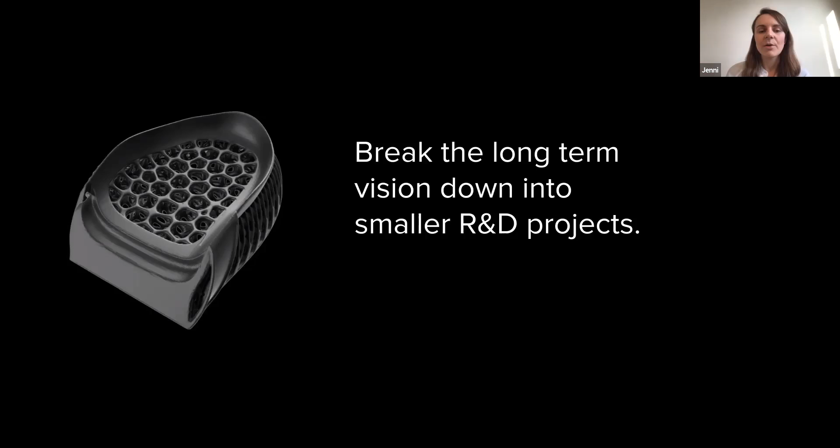Finally, look to technology partners for expertise and support. These are very novel technologies, and whether you're working with Formlabs or your CAD provider, they have great sales engineers and applications engineers whose job it is to help you figure out how to leverage their technology for your specific application. Do your research and homework, but don't wait until you have everything figured out to start talking to these companies. There are great people there working with hundreds of different companies, asking themselves the same questions you might be asking. I'd suggest approaching a company earlier rather than later, and looking for seriously impartial advice.

So yeah, we talked a lot about generative design. Formlabs doesn't make generative design software, but we work with a lot of customers who use it, and we thought it would be great to share this high-level view of the space to make it more tangible for you. But if you want to learn more about 3D printing, that's what we're great at and what we know about.